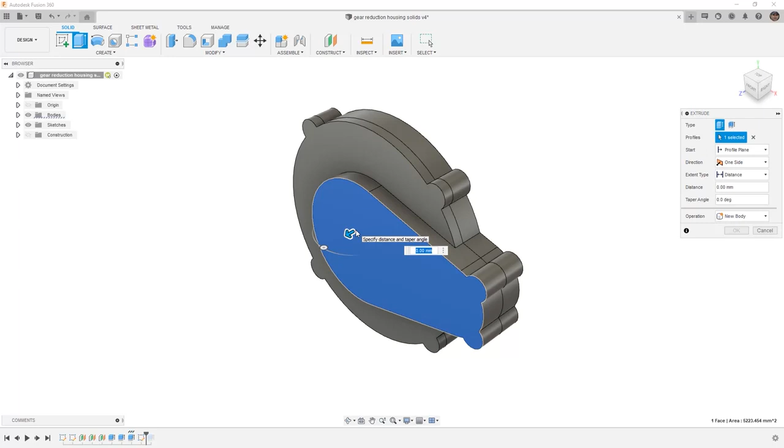In Fusion 360, we want to carry on with our gear reduction housing solids. The first thing that we're going to do is we're going to roll back the last extrude cut that removed material from the front housing. I'm going to create another extrude by selecting extrude and selecting the front face. We're going to go to the gear housing thickness.

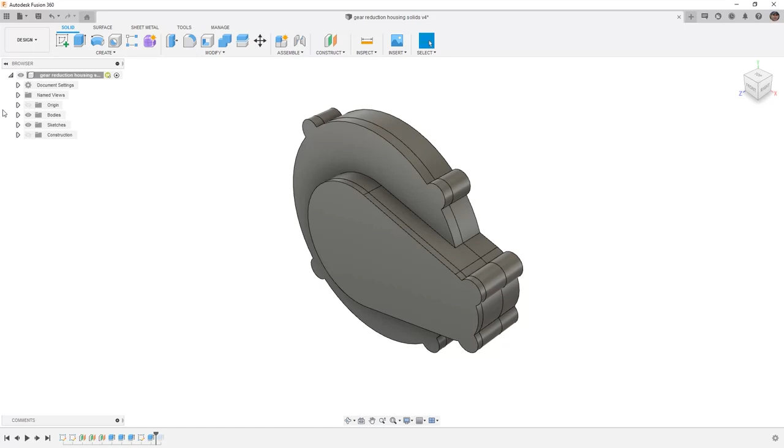So when we take a look at this, you'll notice that as I type in the letter G, even though housing wall thickness doesn't have a G in it, I can still navigate through all of those parameters. I also want to make sure that this is a new body, as it'll be a cover that gets bolted on. We expand our bodies folder. Now we have a body 3, and we can roll the end of the timeline back past that extrude cut.

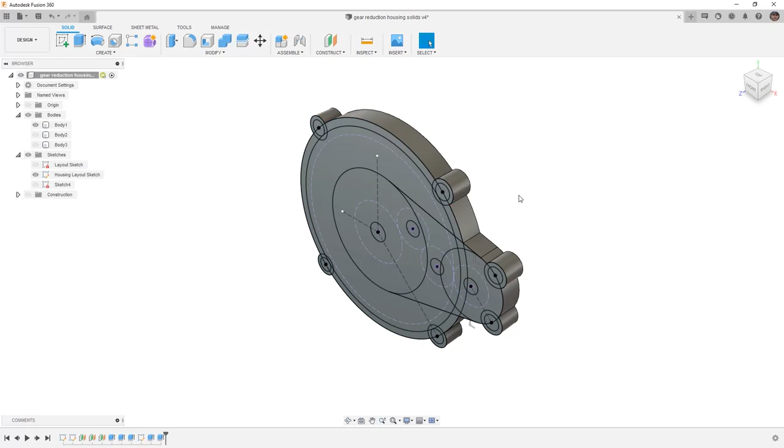There are many other areas where we need to begin removing material, so I'm going to start by hiding body 2, and I'm going to take a look at this face and begin removing some material. If we take a look at our sketches and our housing layout sketch, we already have a sketch in here that will allow us to remove some of this material, but it's not complete yet. So I'm going to get started by creating a new sketch on this face by selecting it, then right-clicking and creating a sketch. Then I want to bring back my housing layout sketch, and I'm going to use P on the keyboard to project some of these sketch entities.

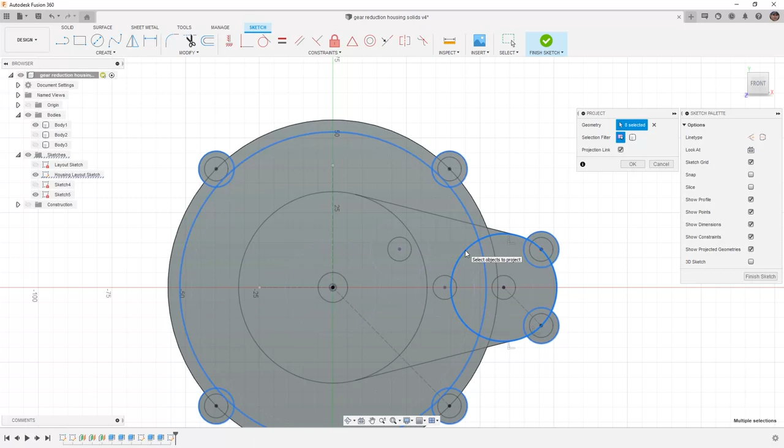I'm going to bring in the outside diameter of the bolt hole locations. I want to bring in the diameter of the inside of this cut that we're going to remove. And I'm also going to bring in some of these outside diameters inside this small area. And I'm going to bring in this edge as well. I'm going to say OK, and then I'm going to use offset to bring this edge in. It's going to come in a value of 4 millimeters, but I'm going to use the minus sign, and I'm going to add the gear gap parameter. The gear gap parameter right now should give us enough offset inside of here.

We can validate this by taking a look at the original layout sketch for the position and the size of the gears. Remember that these values are actually the pitch diameter, so it's in between the teeth. We're not 100% sure if this is going to be enough room. We can always go back in to change parameters, even inside of the sketch. We can take a look at some of the values that we have. You'll notice that our gear gap right now is 5 millimeters. And our gear thickness is in here at 8 millimeters and our housing wall thickness is 3 millimeters.

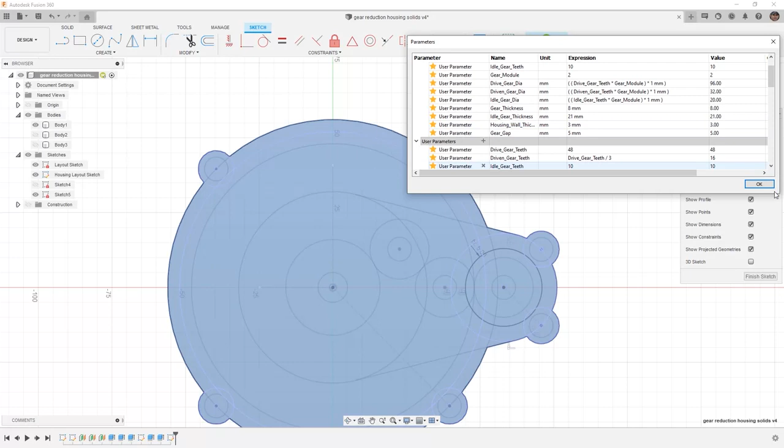So what I'd like to do is come back and modify this value. This is going to be our minus housing wall thickness value, which will give us a little bit of a smaller offset. We're going to use that value for now, but note that we might have to come back and change it. We're going to go back, hide the original layout sketch and the housing sketch to take a look at our results. What we want to do from here is finish our sketch and create our extrude cut.

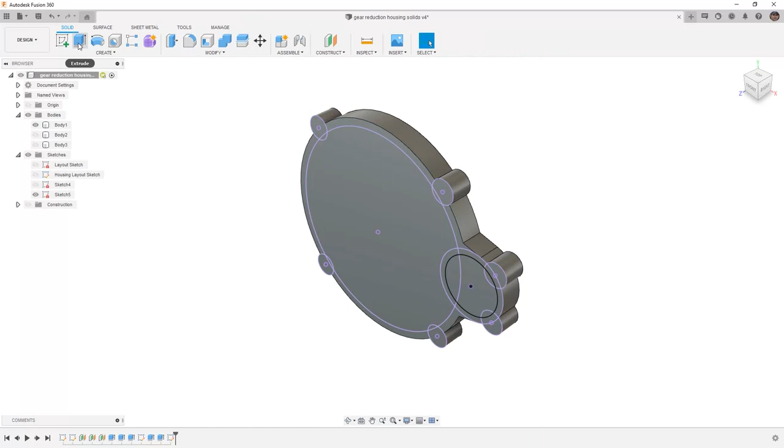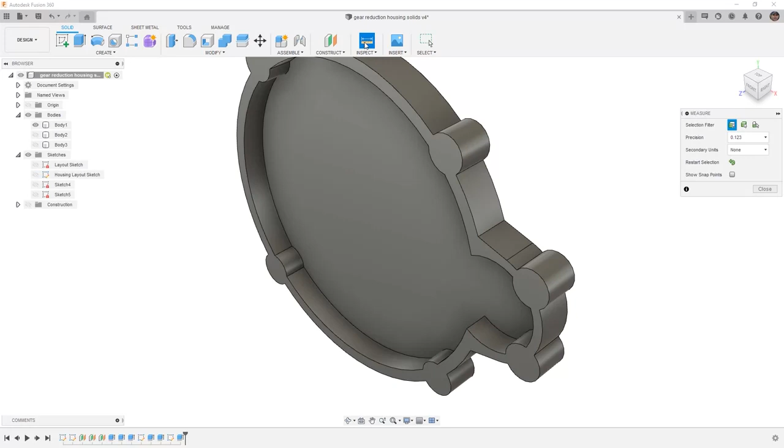We're going to take this inside area as well as some of these other areas that we've created and begin dragging them backwards. As we do this, I'm going to enter minus, and then we need to use our gear thickness value. So the gear thickness value should be 8 millimeters, and if we say OK, we can validate that by going to inspect and taking a look at the depth from the top face to this bottom face and noting that it is 8 millimeters. So everything there looks good.

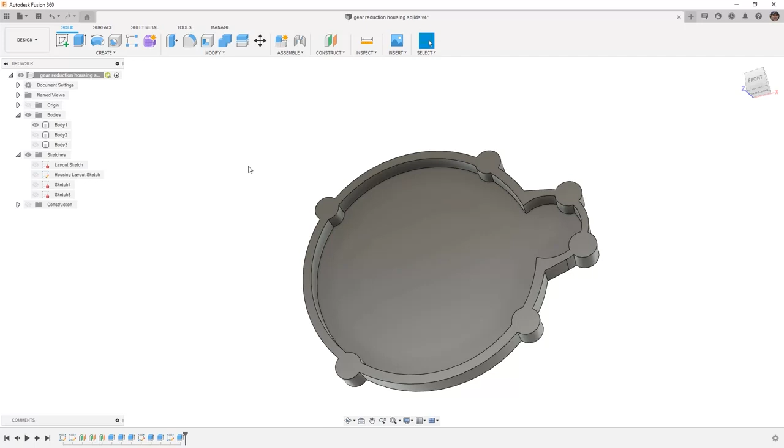Obviously, we will need to make some adjustments to the housing, but this is giving us a good start to make sure that we have enough room or clearance for those gears. Once we actually create our spur gears, we'll be able to see a little bit better the different areas that we need. We can always go back into any of these sketches and make adjustments as necessary.

For example, if I want to use project by hitting P on the keyboard and bring in this edge here, and then offset that edge, making sure that chain selection is turned off, I can bring this one in that same minus 3 millimeter distance, and we're going to use that housing wall thickness value and say OK. Using my right-click marking menu, I can repeat that. And this is going to be a minus housing wall thickness value on this side as well.

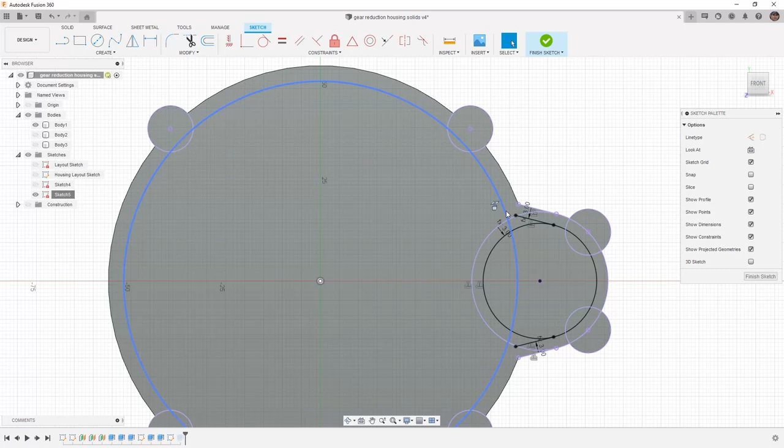And those lines can be extended out until they intersect this projected edge. They can do that by simply drawing a new line that is collinear. Depending on which constraint gets automatically applied, you might note that it's parallel or collinear, and you'll notice that it looks like it extended it for us. We're going to finish the sketch.

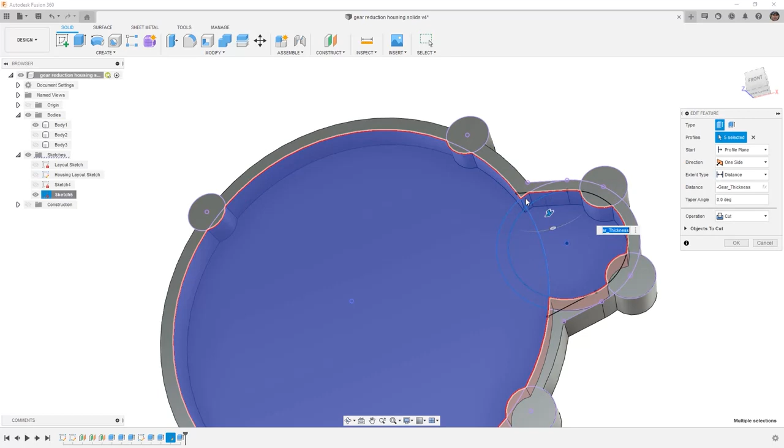Modify our extrude cut, and we can come back and reselect some of these areas that we also want to extend and remove. By hiding sketch 5, you can see that looks a little bit cleaner and gives us that consistent wall thickness. We view this from the front and pull it to the center of our screen. We've now removed a large amount of material from the center of this back portion of our housing.

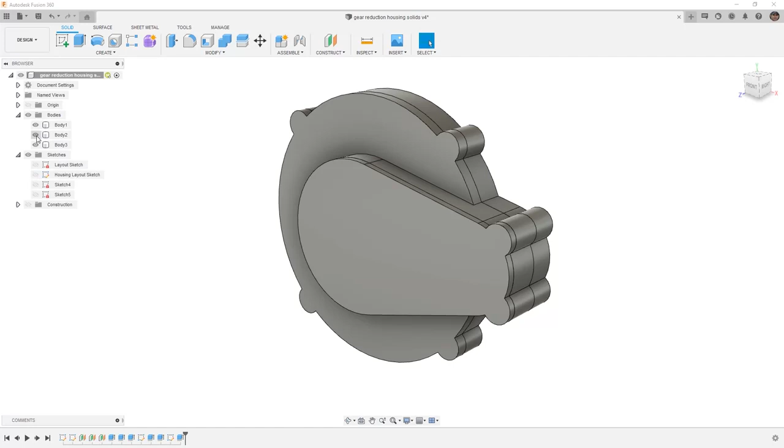If we bring back some of the other bodies, you'll notice that now we have room for gears on the front side of this, which will be our driven and idler gears. Our long idler gear will go through the front of this housing all the way to the back housing. And this other piece is simply going to be a cover. And this will give us a position to have a counter bore for things like a shaft that runs through some of those gears.

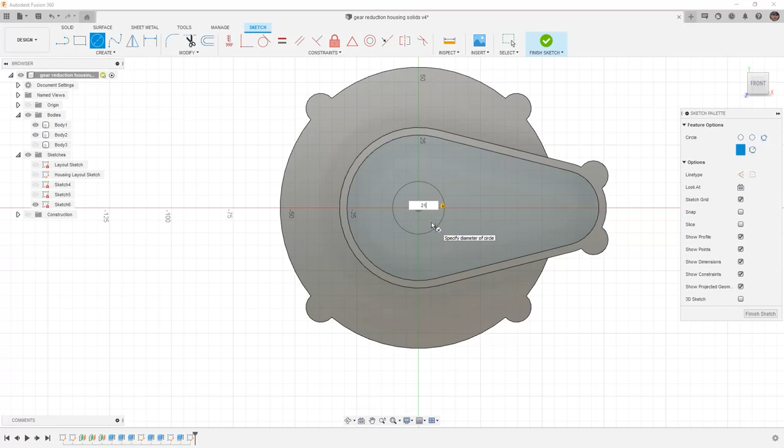There are other areas that we need to remove, so let's hide body 3 and show body 2, and let's start a new sketch. We're going to use a center diameter circle and set this to 21 millimeters. The 21 millimeters is going to represent the outside diameter of the bearing that's going to get used in the middle of this housing. I'm going to say extrude cut. I'm going to begin dragging it back, but I'm going to change this to go through all. Objects to cut will be both of these bodies, and we'll say OK.

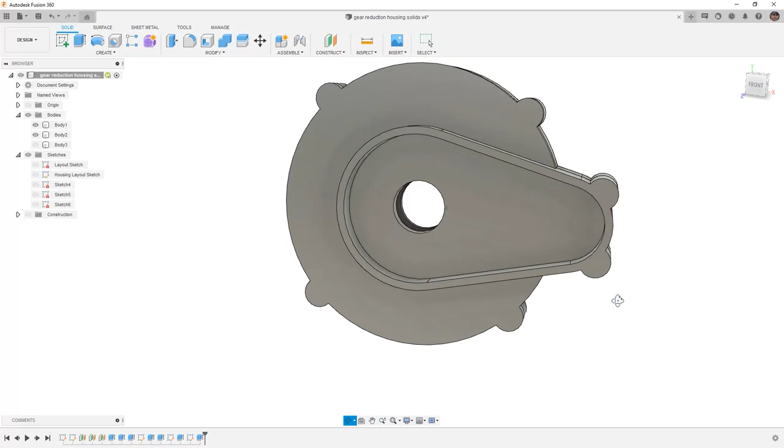Now I have space to mount the 21 millimeter bearing on the inside of that housing and some room on the back side of this housing. We will need to add some additional material because the bearing is thicker than the wall housing. If we bring back body 3 and we right click on that feature that we just created, we can make it go symmetric or two sides.

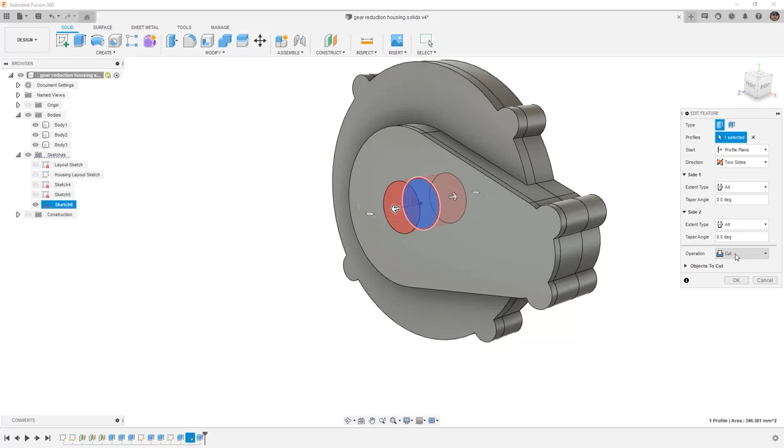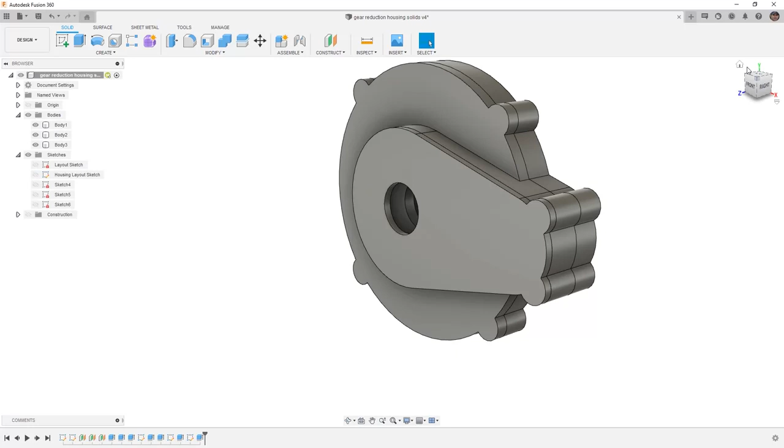And the second side, we can drag it forward and set the distance to through all, allowing it to cut through all 3 portions. Notice in the preview that it's not showing it cutting through, and that's because when we modify this feature, we need to make sure that we include body 3 as one of the objects to cut. Because it was originally hidden for the first extrude, it's going to automatically be excluded, so you need to make sure that you toggle that option on if you want to include it in the extrude cut.

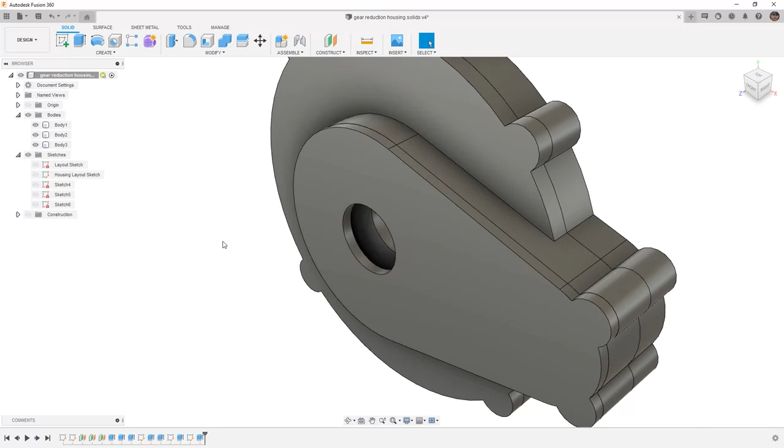Let's go ahead and add some additional geometry to the front of the housing to hold that 21 millimeter bearing. If you'll remember from the McMaster-Carr website, this 21 millimeter outside diameter bearing has a 5 millimeter thickness. If we take a look at inspect and we figure out the thickness of this housing, it should match 3 millimeters, which was the housing thickness value that we used. So we're going to start a new sketch on this front face. We're going to select create sketch.

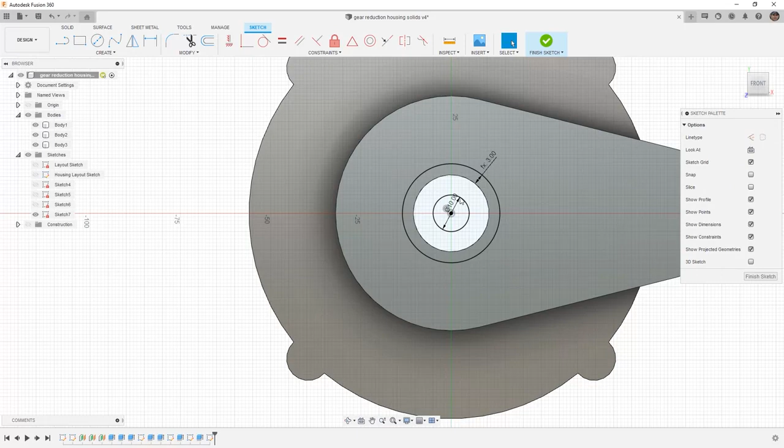And using our center diameter circle, we're going to create a center diameter circle that's larger than the housing based on the housing wall thickness. We can do this by adding a dimension and begin to type H for housing wall thickness. And now we have a 3 millimeter thick section. I'm also going to use a center diameter circle in the middle, and this is going to have a 10 millimeter diameter. This is the size of the shaft that we need on the input and the output side. We're not necessarily going to use all of these in the same position, but we're going to make sure that it's all included in this one sketch.

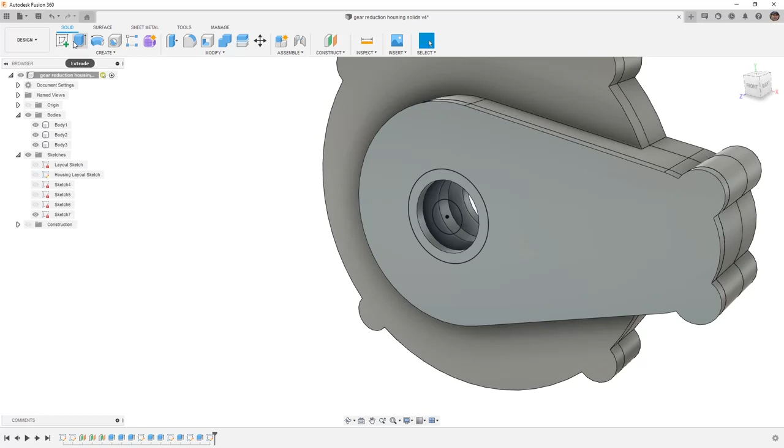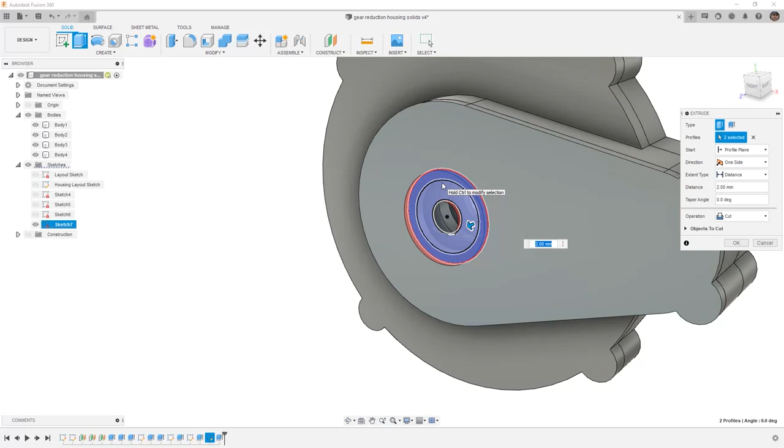Remember that we have 3 millimeters of the wall thickness here, and we actually need to have 5 millimeters for the bearing. So we're going to create an extrude. We're going to just take a look at this wall. We're going to extrude it out a distance of 2 millimeters, which will give us the complete 5 millimeters for that bearing. I'm going to create a new body here and say OK, and bring back that last sketch. Next, I'm going to create another extrude, which is going to include both of those regions. To include both of these regions, it might become problematic if you have other geometry, so sometimes you might have to hold Control or Command down in order to reselect that geometry.

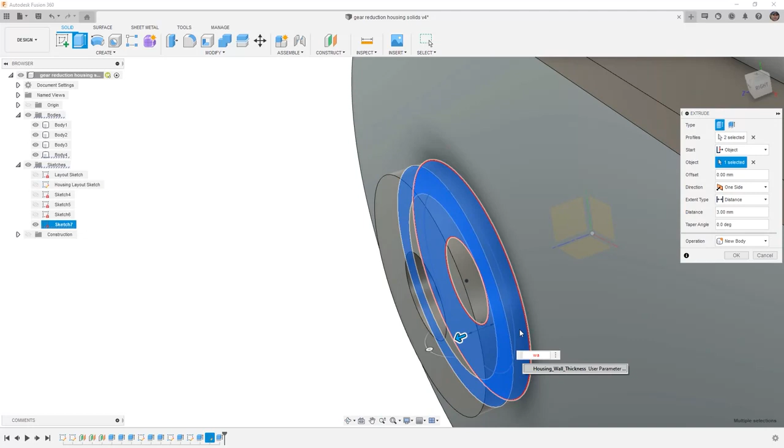What we're going to do from here, instead of cutting, is we're going to start at an object. So we want to start it at the end face that it's trying to remove. Notice that the extrude cut is automatically removing that face, so we need to reverse the direction. We're going to set it to a new body, and then we're going to pull it out a distance of wall thickness. So using that housing wall thickness and creating that new body, then hiding the sketch, will give us these 3 separate body sections, and now we can use combine to join them together. These could have been done as a join in the extrude, but sometimes it can be helpful to create them in their own sections, and that way we can go back and use combine later on.

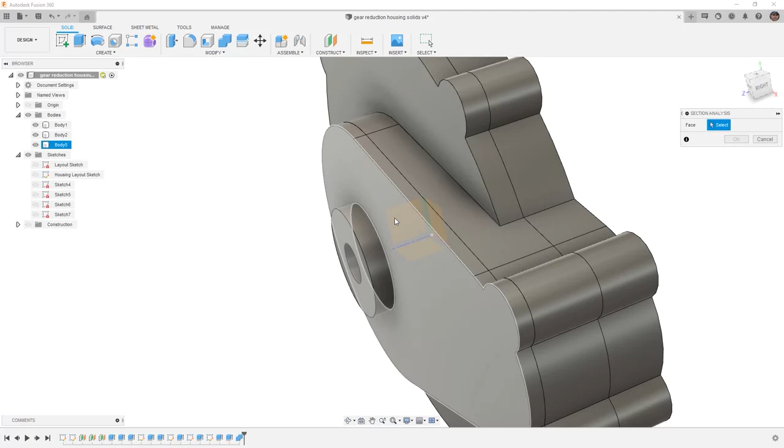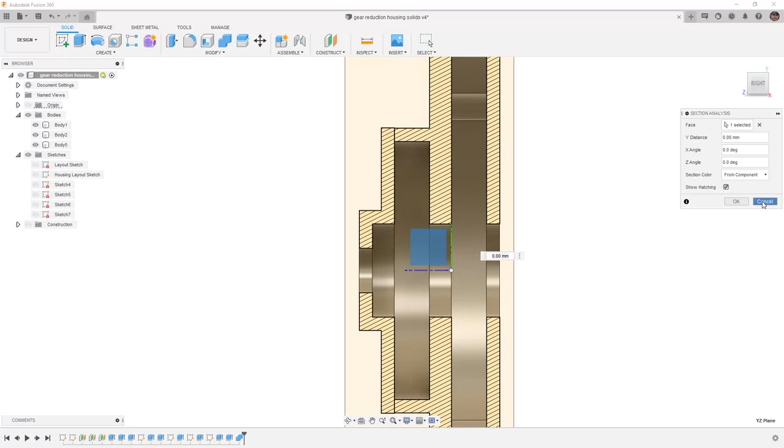I'm going to use inspect and section analysis quickly. I'm going to hold down the left mouse button and select my YZ plane to quickly take a look at what we've done. I'm not going to save my section view, but I want to note that we have a 5mm section here. We have our 3mm wall thickness, and this helps us include that 21mm bearing, and it has the 10mm opening for our input and output shaft. So I'm going to say cancel on the section view so that I'm not saving that analysis just yet. And I want to make sure that I do save this design before moving on to the next step.